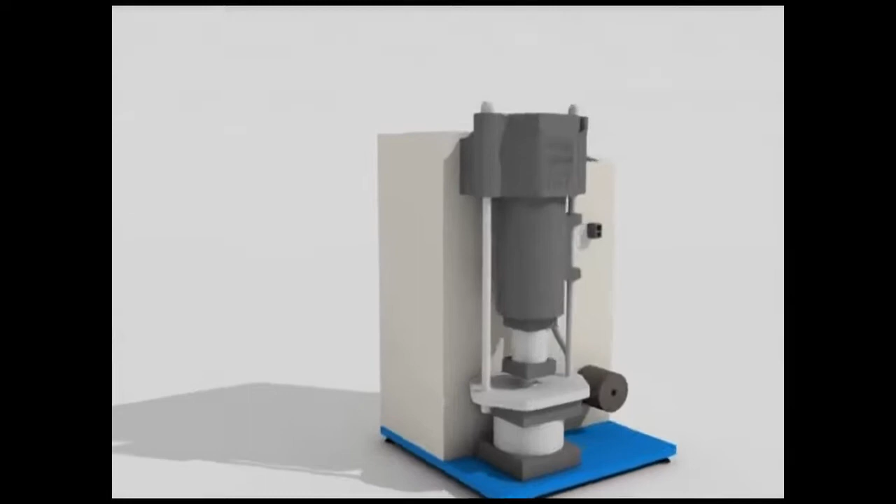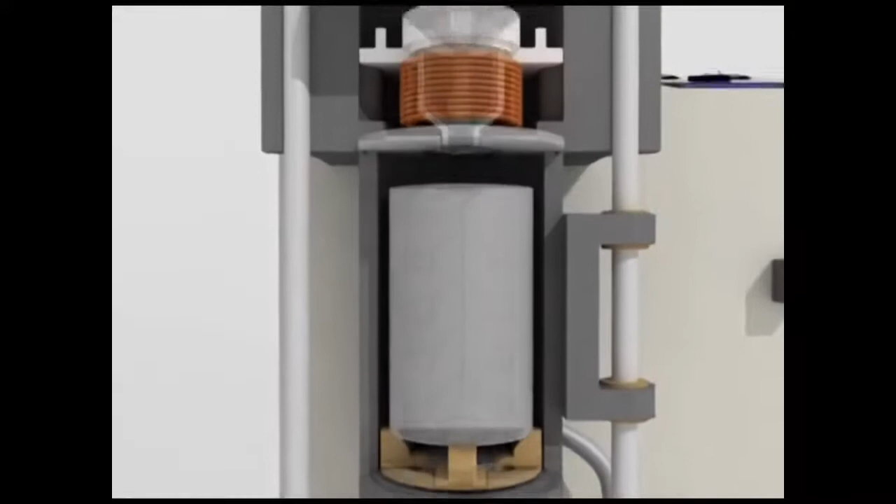The system used in our G-series casting machines is a vacuum overpressure under inert atmosphere. The casting pieces have a very smooth surface, a very dense molecular structure, and no defects such as improper filling, porosity, and shrinkage. In our system, both the flask and crucible are located in a common chamber.

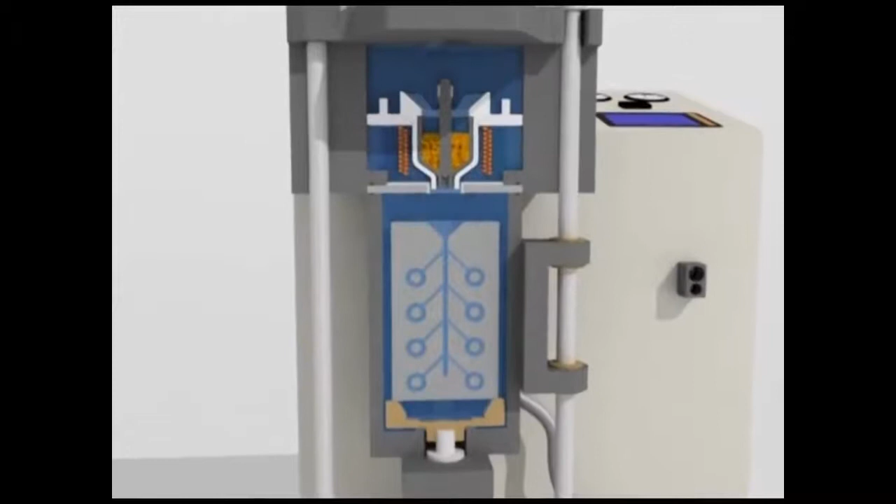This chamber is first fully evacuated by vacuum before melting, followed by helium gas supplied to create an inert atmosphere. Helium gas presents excellent gas fluidity, which provides a cleaning effect of the molten metal and mold, and guarantees a smooth filling of metal, even with the most intricate patterns.

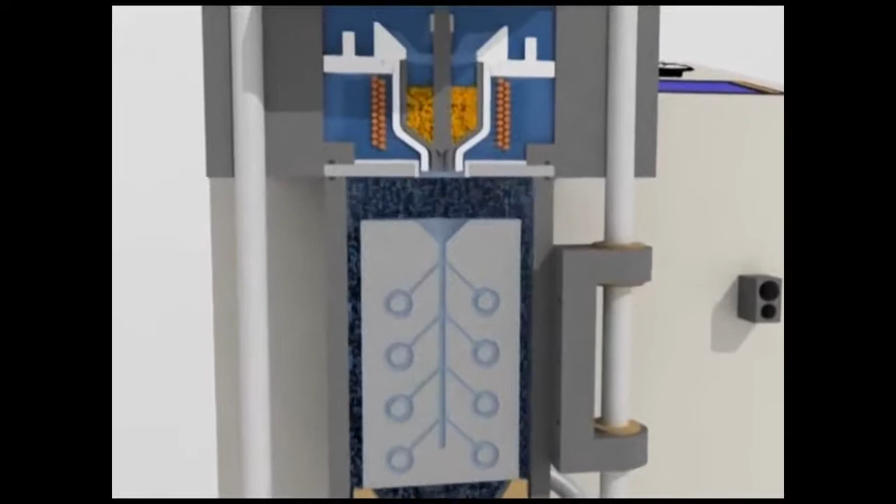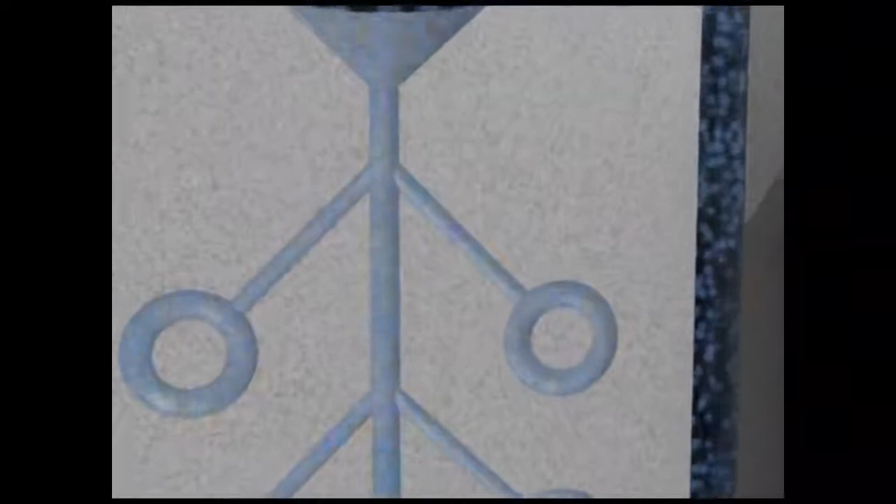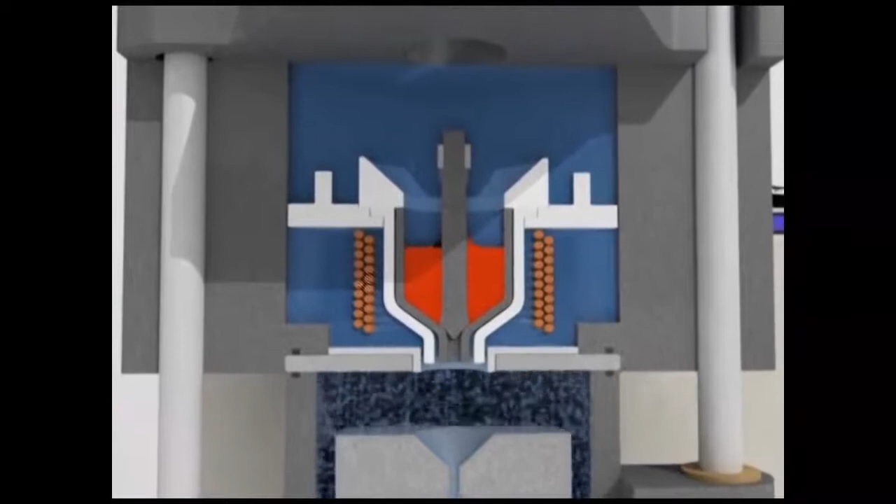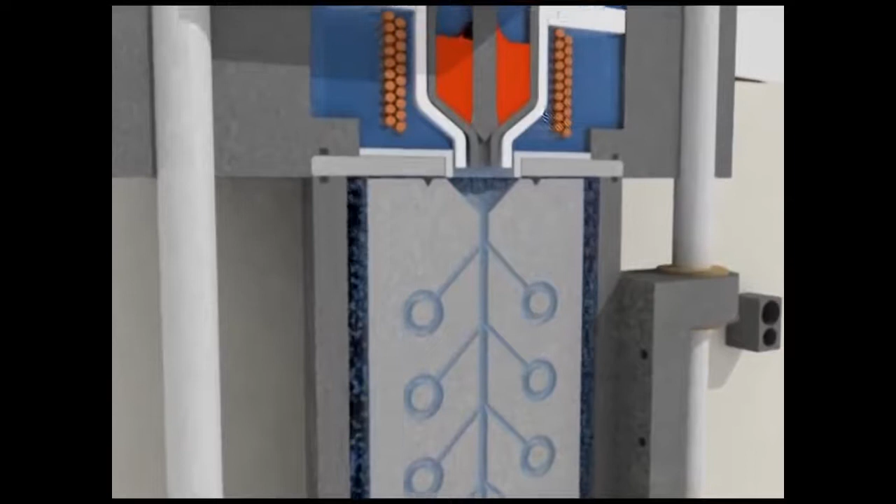The casting temperature is attained, and low-frequency pulses are given to vibrate and mix the molten metal, keeping it homogeneous. At this stage, the flask is pushed against a long-lasting special metal sealing blade system, or SBS, which, like a knife, cuts the investment by sealing the vacuum underneath the flask.

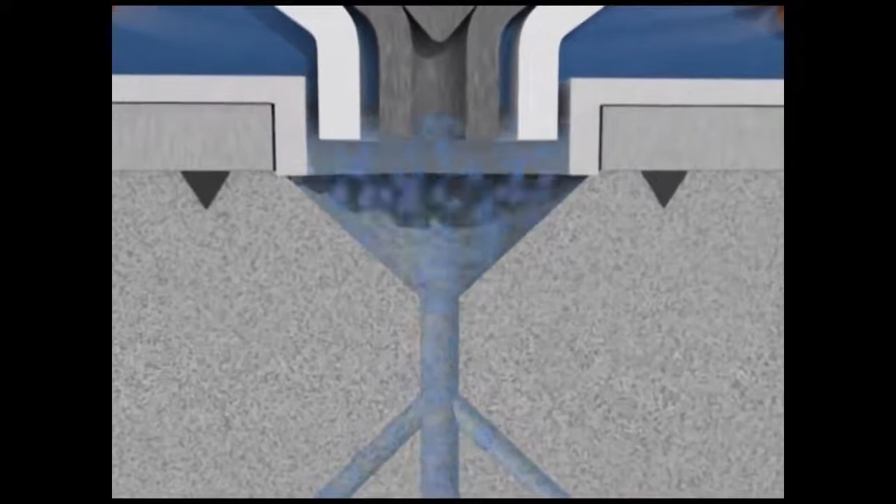This long-lasting system avoids the use of silicone gaskets or a flask with flange, with an important reduction in casting costs.

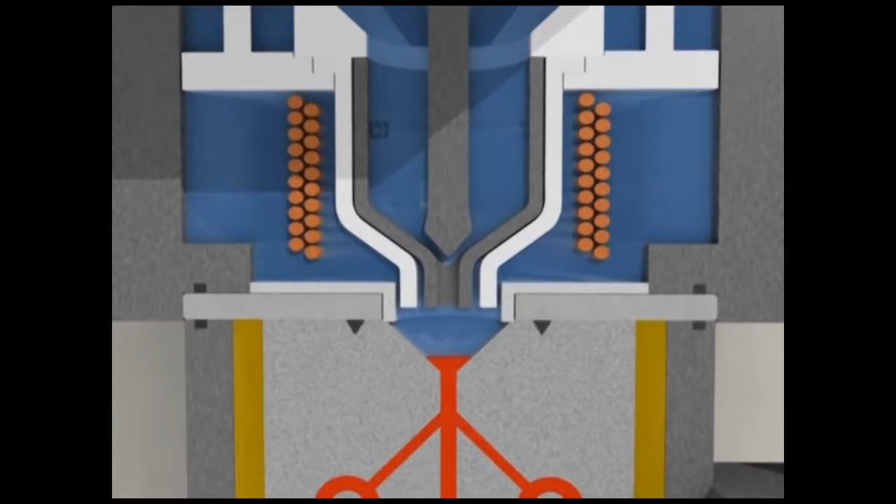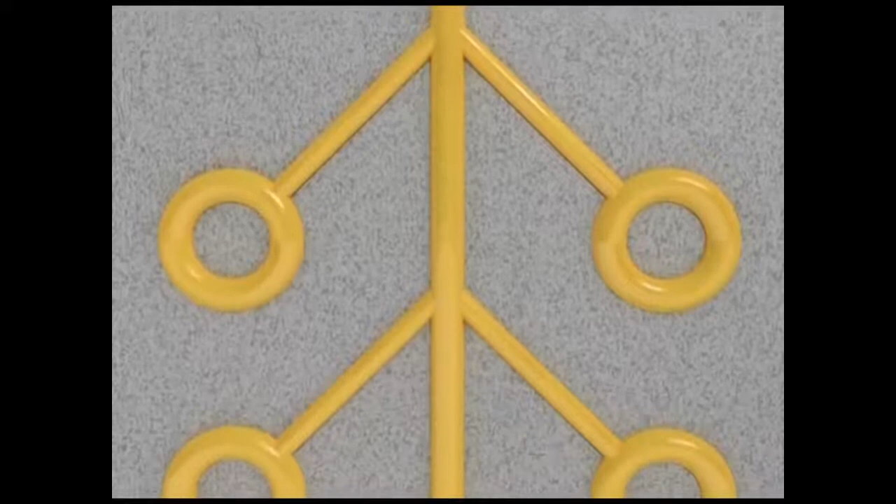The metal, once completely poured into the flask, is pressurized by argon up to 4 bars. This pressure, being applied to the molten metal, forces it into the mold while the vacuum pulls it. This results in a very smooth surface due to the effect of the vacuum, and a dense, well-compacted casting due to the overpressure, which benefits both thick and thin sections.

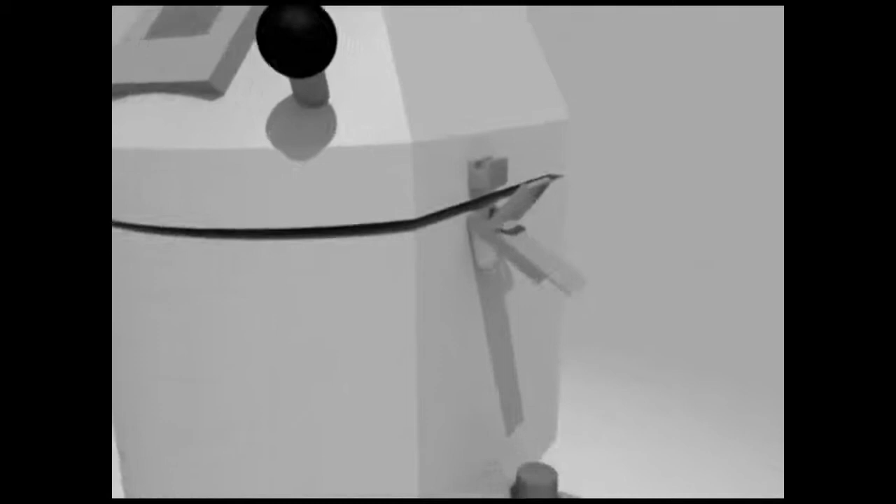In most of our competitors' machines, the metal cannot be effectively pressurized up to 4 bars, since the machine's structure does not allow for this, and under this pressure the cover will blow out.

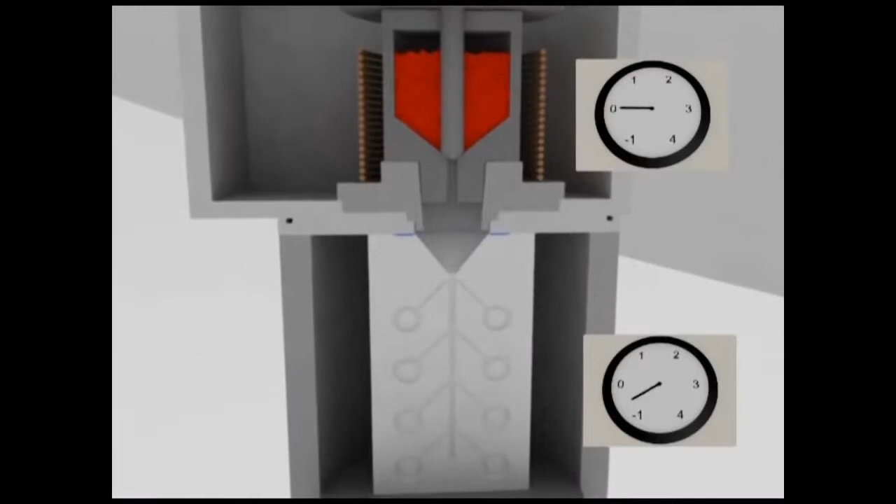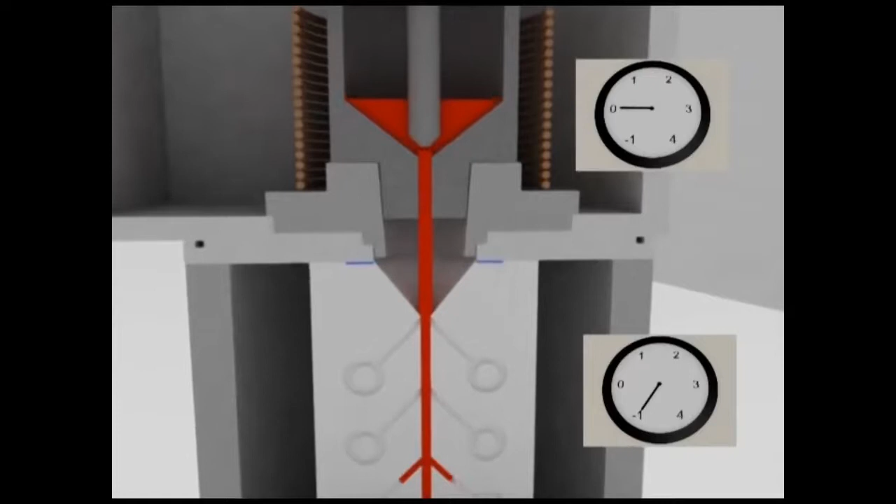During normal use at 1, maximum 2 bars, the applied gas pressure above the crucible can only act on the metal once the mold is occupied, by jetting through the crucible feed hole to the underside. The effect of this pressure is drastically reduced by drag of the crucible holder, etc. In fact, application of gas overpressure by this method shows no significant advantage over a simple gravity vacuum system.

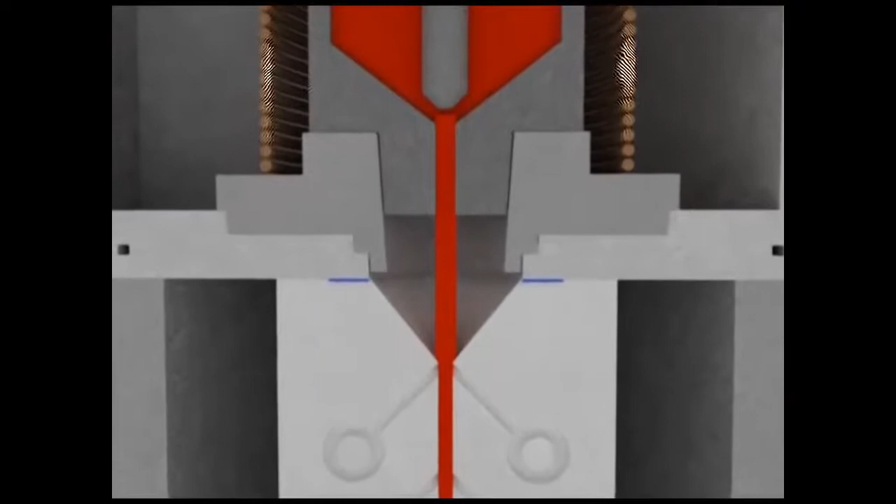A further disadvantage of these machines is that there is usually a gap of 4 to 5 centimeters between the crucible feed hole and the flask entry, which frequently leads to splashing and gas absorption problems.

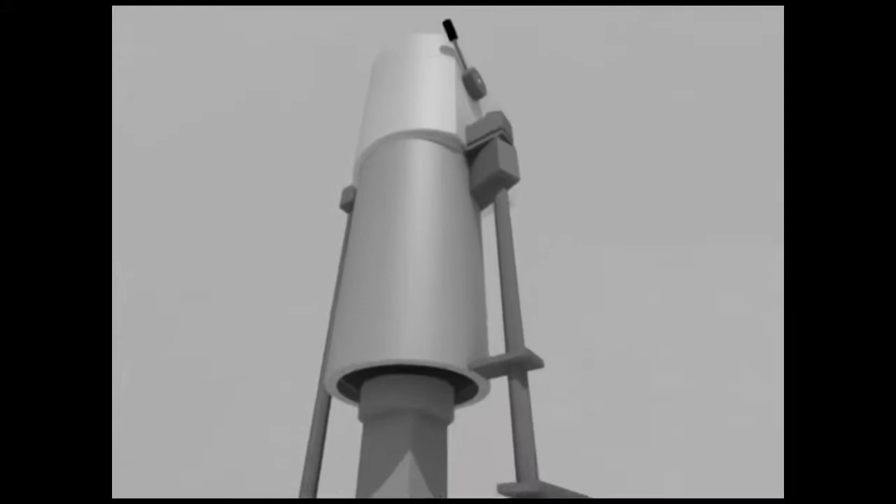In the separate chamber machines, the syringe effect is guaranteed by special gaskets and cements underneath the crucible to keep it sealed. After the vacuum is applied, the flask is pushed against a silicone gasket and inert gas is supplied. When metal is molten, it's poured into the flask.

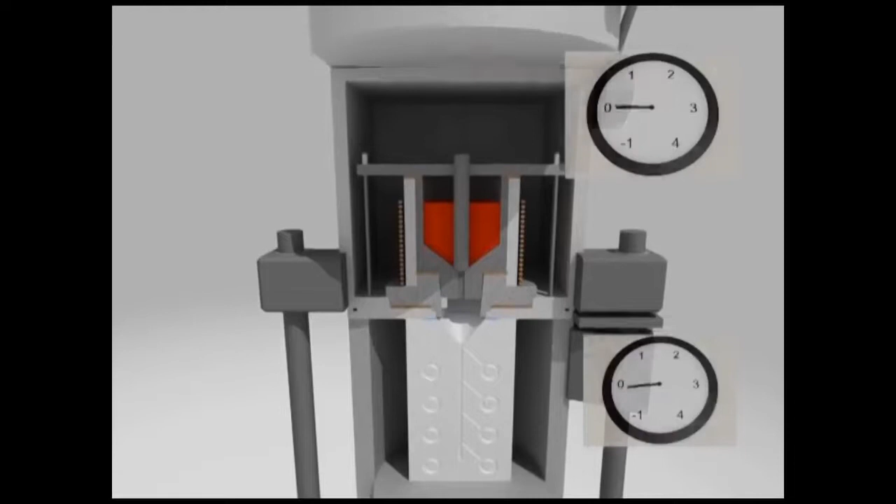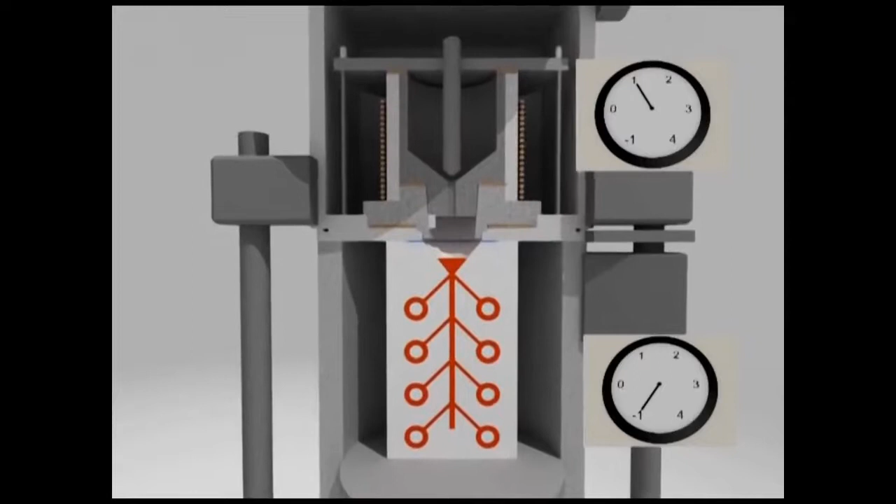At the same time, a gas pressure is applied to the crucible chamber at 1 bar maximum. When the crucible gasket and sealing are proper, the gas pressure will push out the metal from the crucible by increasing its pouring speed, while the vacuum pulls it.

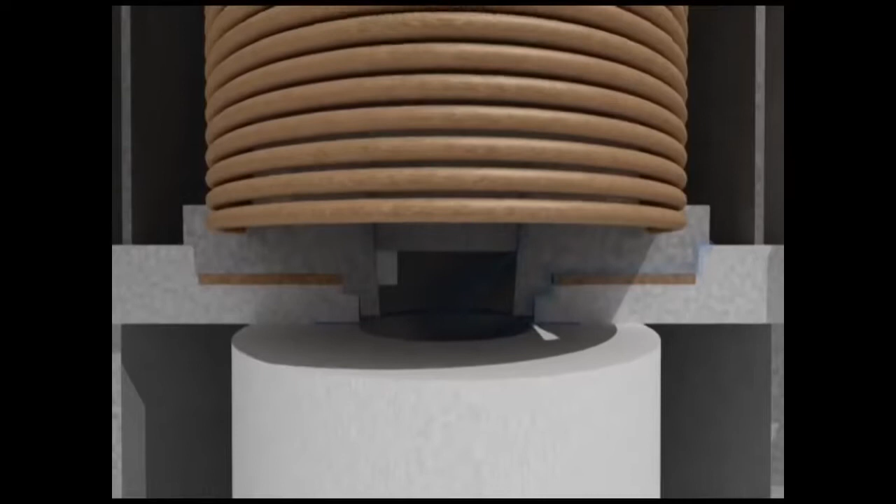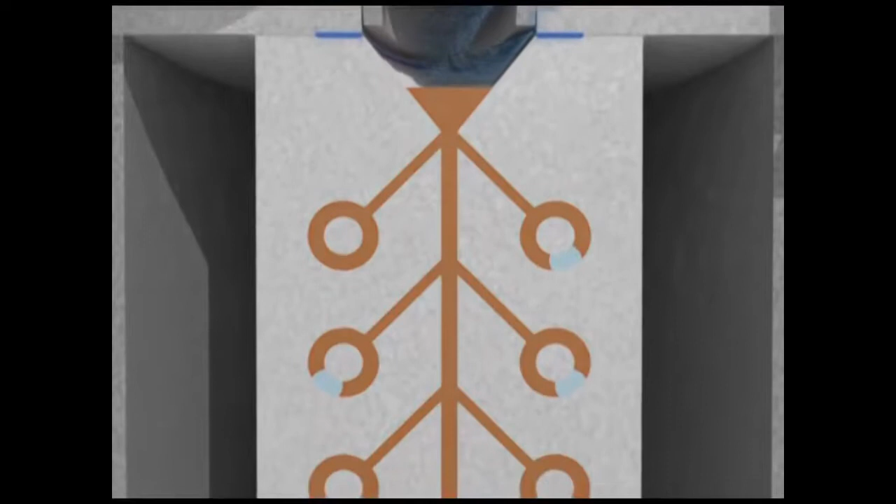But when the crucible gasket and sealing are worn, after a few castings, the gas pressure goes through the crucible ceramic holder and it's absorbed by the metal. This phenomenon, together with the metal injection speed, creates gaseous formations, which cause improper filling, damage to the investment, and rough surfaces, as in the old centrifugal systems abandoned a long time ago for the casting of gold and silver.